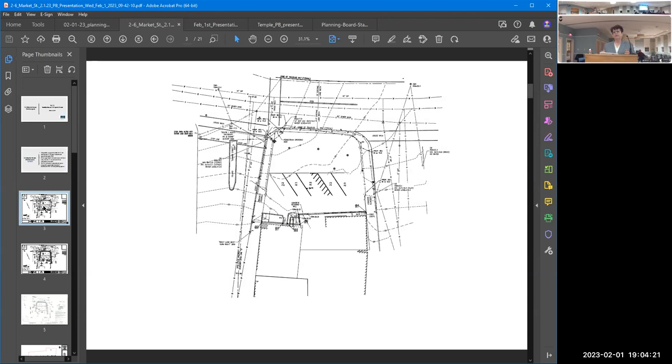And so the applicant can install 5 lifts, which would accommodate 10 spaces, and then there's an at-grade space on site, which was what the original plans were. It does not change the topography of the site. There will be modifications to where the lifts actually attach to the site. And again, if you want Matt to talk about that, we have that information here, because I know some people wanted more details, but now that we know that it can happen, that's up to you whether you want that presentation.

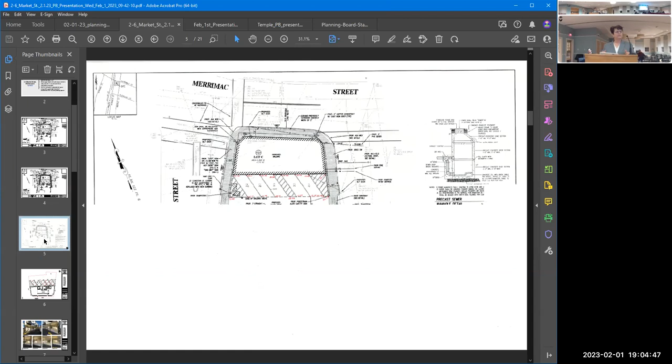So if you go to the next slide, you can see this was the original approved plan. You can see where the original lifts were required, and the at-grade parking spaces up Summer Street on that side. And if you go to the next slide, this is that... the next slide? It's the next one. Oh yeah, so if you go to the next slide, sorry. Okay. Oh, I forgot Matt put all the other slides in. All right, so in any event, there we go.

Thank you, Andy. It's the same thing, it's just a schematic of the various grade differences, but now those will all be filled with lifts. And so we don't need relief for the residential units, which was part of the original permit. However, we are requesting 1 additional ITF space for the commercial space, because the additional 400 square feet goes over the amount that we had.

And so we would request that that modification occur and that you issue an ITI special permit for that additional space. And with that, I can turn it over to Matt if the board has any questions about the details of how that is happening. So before you go there, just to clarify, that space with the handicap space, that's not going... No, that's not going to be there. It's going to be a lift. But the dimensions of the space are as shown there. Those are the dimensions. Okay, if you go to the last slide, Andy. Thank you. So there they are.

I think this is pretty simple. Do any members of the board have any specific questions about the proposed change plan? Richard, Alden, Heather, any questions around this? Sorry, this is Richard. Only to add that this is great. We're so happy that the manufacturer was able to accommodate.

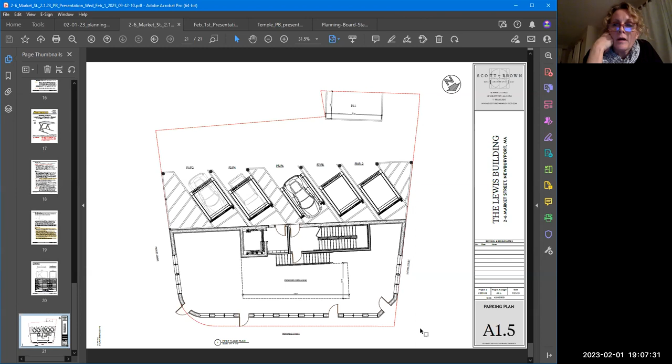So if board members don't have any other specific questions, I think we just move on to the public hearing. I'll just open it for public comment. Are there any members of the public who wish to be heard on this application? I don't have any questions, but I think this is fantastic, and I commend them for going through so many channels to get this right. Seeing nobody from the public, I'll close the public comment and ask the board for your preference on this.

I guess the question would be, do we have a motion to amend the prior special permit for ITI to change it from 6 spaces to 7 spaces? Correct. And we could basically use the prior findings with just the modification of the numbers. And that's it. It's just a couple of modifications to the prior findings. Do board members want me to recite those, or is it simple

enough? Okay. So could I have a motion then to amend the prior special permit to change the number of spaces for the ITIF from 6 to 7? I'll make the motion. Second. Okay. Then I will go through the roll call. Alden. Yes. Yes. Jamie. Yes. Heather. Yes. Yes.

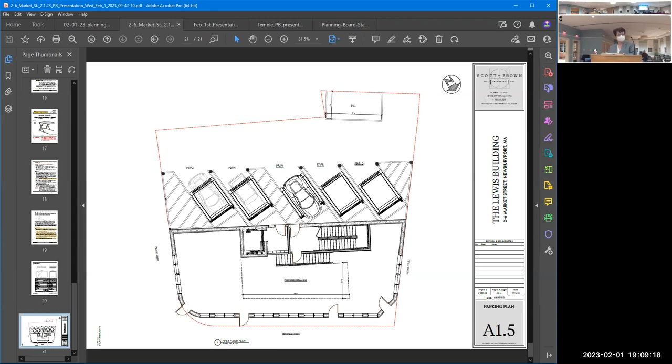We need this vote. There he is. Richard, are you with us? I said yes. We lost the connection with you. Thank you. Okay, yes. And the chair votes yes. There you go. Thank you very much.

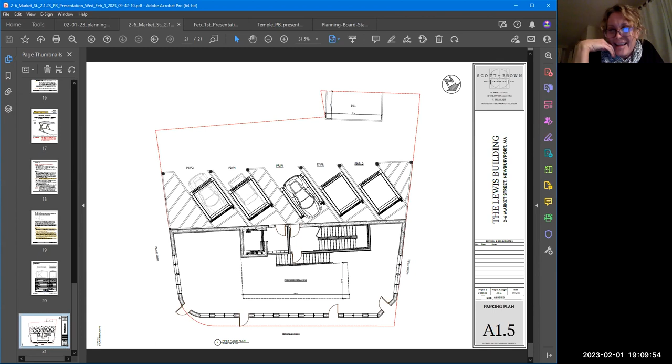Rick, yes. I feel like I'm either losing the connection or I'm having just a hard time hearing when it's not someone speaking at the podium. It's going in and out, I feel. Difficulty hearing my microphone? I don't hear complete sentences from you. And I know that you're probably speaking in complete sentences. They're not coming through that way. Just wave your hand if you have a problem.

Okay, the next item on the agenda is the request for Kenneth Woods at 20 Temple Street for a special permit for non-conformities. Yeah, I am Ken Woods from 20 Temple Street. Can you speak a little bit louder, please? I'm Ken Woods from 20 Temple Street. What do you want to make? We have a couple of slides up from your materials. Did you want to speak to those for the board? So they have a summary of what you're looking for. Okay, sure.

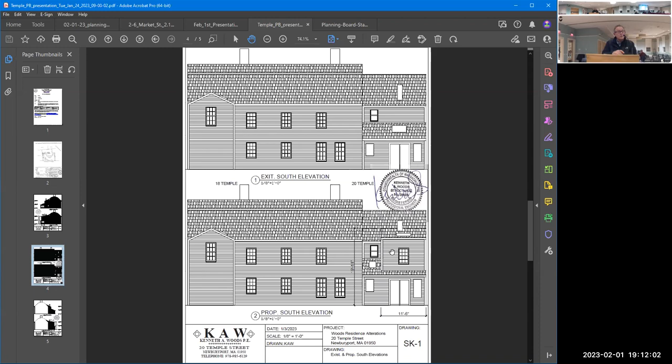That's the rear view. On top is existing. Yeah, the new stuff, he's mousing around the new proposed. It's about 11 foot wide and 7 foot off the existing rear wall of the second story. That's the view from the west. Same idea. 7 foot off the existing rear wall.

Do you have anything else you want to present to us, or is that it? No, that's it. Is there anything more you need? We'll find out. Okay. So again, so the board understands this, this is not the type of special permit that typically comes to us as a special permit for non-conformities. It's the type of thing that the zoning board would typically see, but because it's in the downtown overlay district, it comes to the planning board rather than the zoning board. And so, are there any questions about the application from the board members?

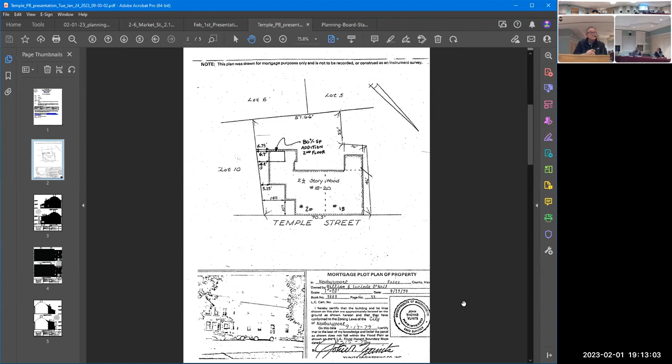Yeah. Just a couple of questions. I noticed that, at least from what I can see, there are no materials identified on the building elevations. So could you talk a little bit about the existing clapboards, and with the addition, are you intending to match the existing? What are the basic materials that you propose?

Yeah, well, the building is originally 18th century. It was a salt box to start. It turned into a gambrel form in 1767. In 1832, the 2-story shed was added on the east side. All of it's in wood clapboard. All the windows are wood, true divided light. Put true cedar shake on the roof. I intend to match every aspect of what is there now. Thank you.

Any other questions from members of the board? See anybody? Okay. In that case, I'll open it up for the public hearing. Is anybody from the public who wishes to be heard on this application? I don't see anybody, and we have one person remotely watching. Okay. So in that case, I'll close the public hearing and suggest that we have a motion to approve the special permit for non-conformities as submitted, or any other modification. And we include the comment about material.

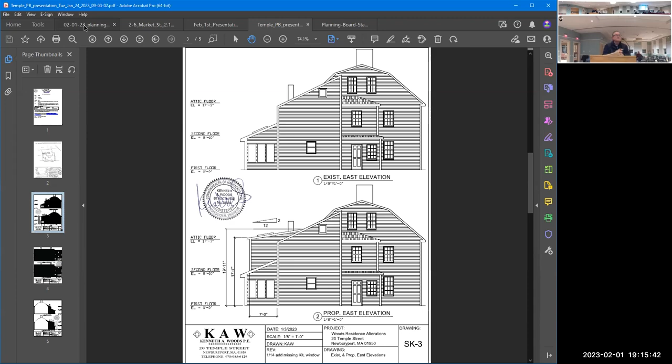The next item on the agenda is the request for a minor modification at 3 Doyle Drive. So I'm Noel Teresi. I'm speaking for Judy Burke. Could you speak up? I'm sorry. I'm Noel Teresi. I'm speaking for Judy Burke, the homeowner. The closer you speak to the mics, the easier it is for folks remotely. Oh, so is that better? It's better just because it amplifies voices.

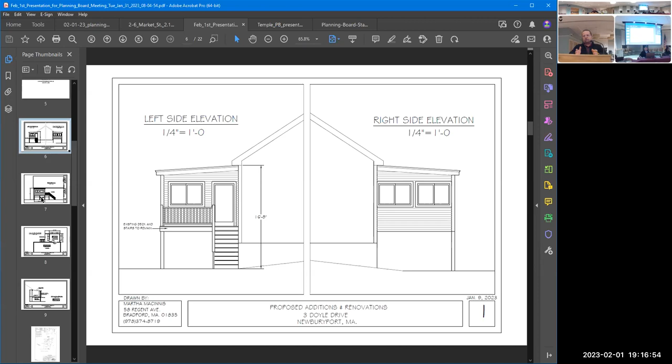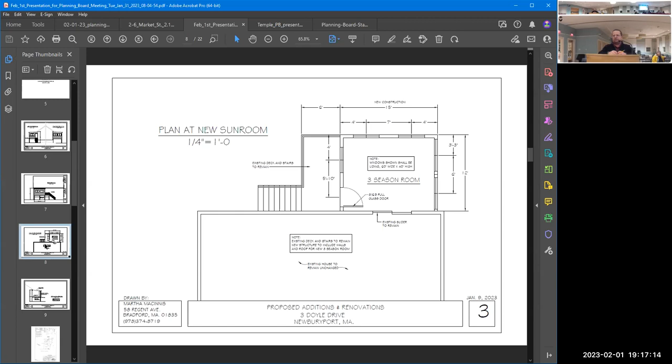Thank you. So we were here last month and we were asked for a better set of plans, which I believe we provided. We also provided letters from all the abutters that they saw the plans and that they approved. I'm not sure if you have the copies of that, but I do have a set of copies. You all set? Yeah. So it's basically what we had spoken about last time. It's an existing deck. She would like to close in part of it to turn it into a 3-season room. All the siding and roofing will all match the existing home. And the elevations show pretty much everything that we're doing. I don't know if there are any other questions or anything that I can help with. Do the board members have any questions about this application with new plans?

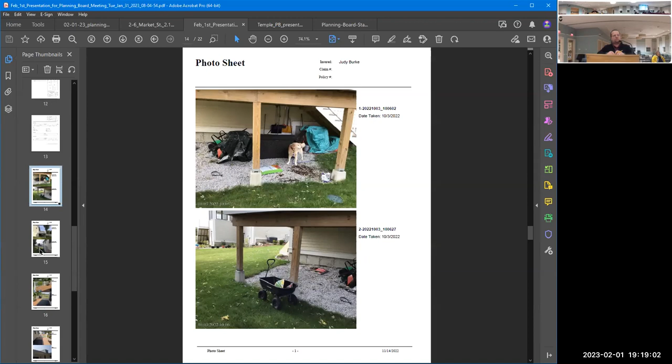There are no further questions or comments from the board. I would like to have a motion to deem this request minor and approve the minor modification request for 3 Doyle Drive with the definitive plan and special permit as requested. So Bob makes a motion. Is there a second? I can second. Richard? Thank you. Okay, we'll go through the roll call again. Alden. Yes. Yes. Jamie. Yes. Heather. Yes. Richard. Yes. And I vote yes also. So thank you. Thank you very much.

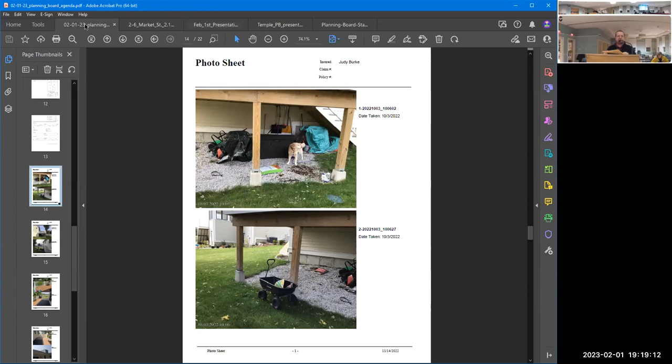So now we move into other business, talking about the zoning discussion that Andy would like us to consider. So you want to do an introduction? Sure, thank you. Members, this is per our mention in the last meeting. I just wanted to get your thoughts, if you have any in particular, and if not, that's fine too. But I just wanted to get any thoughts you might have on two specific areas.

The business park: we're looking at trying to make some zoning adjustments there that may help to spur economic development there, a little bit more potential. And so I wanted to, without throwing anything out there, just get your thoughts based on what you've seen out there, what you'd like to see out there. If there's anything in particular that you'd like to see change, just so I can keep that in mind as we're thinking about making those adjustments. And I'll defer to the chair on any discussion we have here.

But the other area was just outdoor seating, and the general context behind that one is that since the pandemic, there's been a little bit more expansion of outdoor seating. I think generally speaking, that's a good thing. It adds to the vibrancy, downtown for instance. We have seen that both in some of the parklets that the city council oversees, as well as some of the public spaces in the street, along the right of way there.

And we've also had a few private lots where this has been done, essentially swapping a few spaces for the outdoor seating. So the question here, generally, you don't have to get into the weeds necessarily, is do you have any thoughts or preferences as to how we handle that going forward? We'll do some sort of zoning adjustment in the coming months, and we've been talking with a few councilors to try to work out the kinks, to have something that adequately covers in zoning the allowance for that and how it is allowed. In the public right of way, the city council has jurisdiction and can decide where to allow it and how many seats.

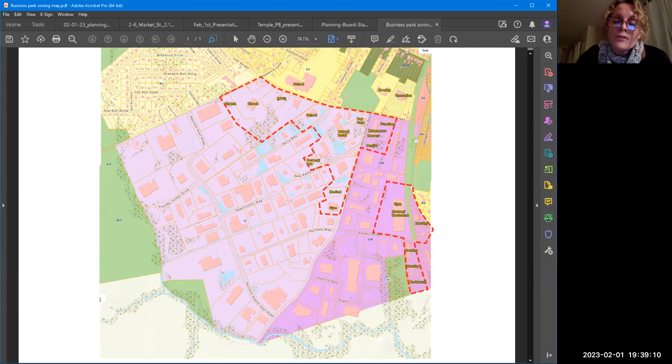When you're talking about creating this transitional district, are you talking about only within this red dotted line, or are you just highlighting these as examples of the industries that are already transitioned? Like, are you saying that we would expand it, or are you saying that we would limit it to sort of this footprint already?

I don't want to speak for Rick. I think Rick was highlighting what's there already, but my sense, and it sounds like Rick maybe is on the same wavelength, is that we're really thinking about it as a corridor or a section as opposed to just restricted to dotted areas. Maybe that piece would extend down Graf Road, maybe extensions of the district, as opposed to being exclusively within the red dotted areas.

I think what perhaps he was showing is the fact that there's already complements of some of these uses there, but one could argue that it should be a continuous district or section, not just these blocks that are blocked on here. Right.

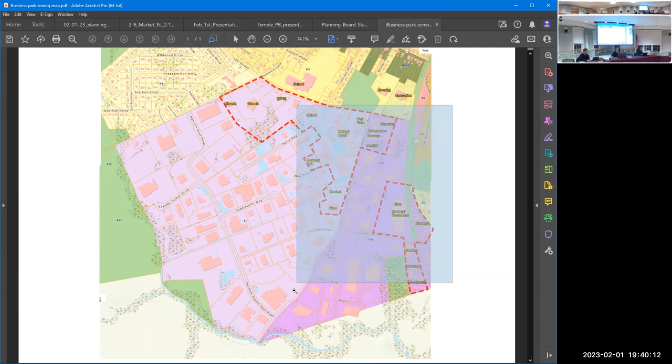Without looking very carefully at what the uses are there, and perhaps even talking to some of the property owners, I'd be hesitant to expand the district to include, for example, the lumberyard, which is really oriented toward retail customers. There are uses in here that are on the margins between public oriented and just wholesale business oriented uses.

The lumberyard is one. There's a plumbing supply place down on Parker Street. There's Plant Works, which is kind of an office use, but it's also kind of a commercial greenery landscaping place. So these are areas that merge. So I think we need to look at it.

I guess that's all I'm trying to say: there are areas that have already changed, where in some ways it's pretty easy to say, let's zone it for what's there. And then there are areas in the middle, between the two red outlines, where I don't know what the answer is. I think we need some study. Does that make sense to you, Heather?

It does. My thought is this has established itself somewhat organically. These businesses have come to these locations because they needed more space, more parking, or the price was right, and they've chosen to be in this area as opposed to downtown. So if we create this district, I'm pointing down towards Opportunity Way, organically some other businesses might cluster in another area of the park.

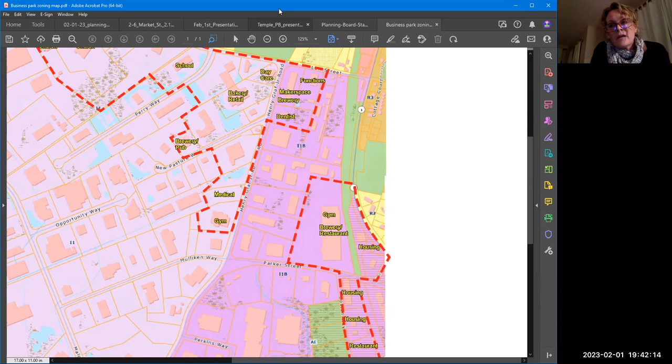So would we be seeing in the future that we would be expanding this transitional area or having pockets in other areas over time, because it may not just grow out of this one section? The park may change as needs change.

Right. I saw it as the near term, maybe the next decade, that the city would benefit from this transitional district. To your point, it's very possible long term because we don't know what's going to be out there decades ahead. There could be more pressure to consider things further in the park. But in the near term it may not be that likely that it expands there, or that we'd want it to expand that far in.

So I definitely think you're right that we may eventually want to look at something like that, but I don't think we're close to that right now. I tend to think it's more towards the northern part or the eastern part of the park generally.

When you say transition, are you talking about use? Like, is it more of a customer focused use? It's something that addresses the street, that talks about setbacks.

Are you all still talking about adding different uses to that thing? Well, I guess I would be thinking about making sure that the uses that have been established over time, however they were established, the schools come in some way, the medical facilities that come in by special permits, the gym probably. I'm not sure how these have come in over time. But I'm thinking that we would want to be thinking about this area as, okay, these are uses that have been let in somehow, whether it's by variance or special permit or something else, and they're working. So let's recognize them in the table of uses.

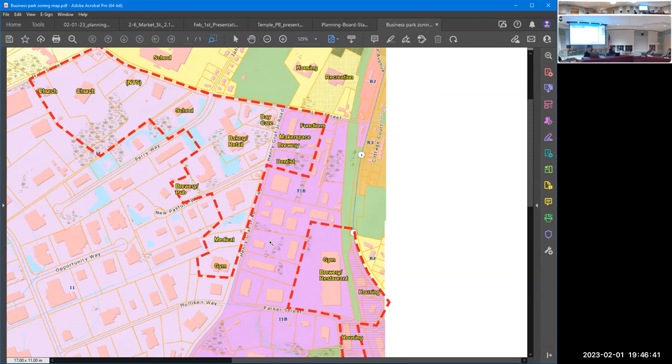I think it partly depends on us to generate the demand, and in turn, look for that to try to adjust the routes. But it makes sense if they're serving the train station and if they're serving the hospital, somehow there could be some kind of link between those areas. Right, and I think in some ways we're trying to establish maybe a better linkage between a residential, mixed-use, transit-oriented district created around the train station, and the employment center and the business park, and not having it be just completely isolated, exclusive uses as we have in the zoning.

So, would you allow multifamily residential in this use? That is not on my radar right now. It may be, like Heather said, something long term the city goes to, but I don't necessarily see it on my radar or something that, in terms of the adoption process, would be palatable right now, or... 24/7 environment, sidewalks, and pedestrians. All of that gets reinforced. So it does have proximity to the train station, it's right next to it. It was pretty close. For multi-family housing, it's areas like this that make a lot of sense.

Yeah, and I can see that as perhaps a longer term or a secondary consideration, but it maybe goes to a little bit of the MBTA, DHCD guidelines we're going to have to be looking at this year and next year, because we will have to look at our 40R district according to the state and look at either modifying that or building off of that to have more residential that's allowed, quote unquote, as of right in proximity, and maybe this area is one of those important

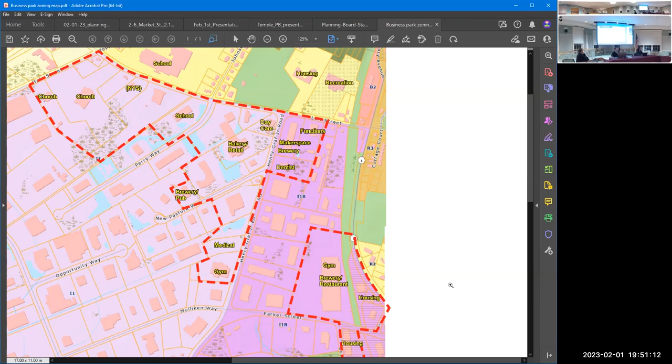I think another point, based on just what you said, is that there's been a significant amount of recent reinvestment or new investment in the rear part of the industrial park, going along Newburyport and Opportunity Way and so forth. And there hasn't been that much in that northern area. It's partially lot configurations, partially wetlands and so forth. But I think this is less likely because of the amount of investment in some of the real manufacturing facilities in the more western part of the industrial park and business park. They're probably less likely to be looking for different types of uses if they've been doing a lot of investment.

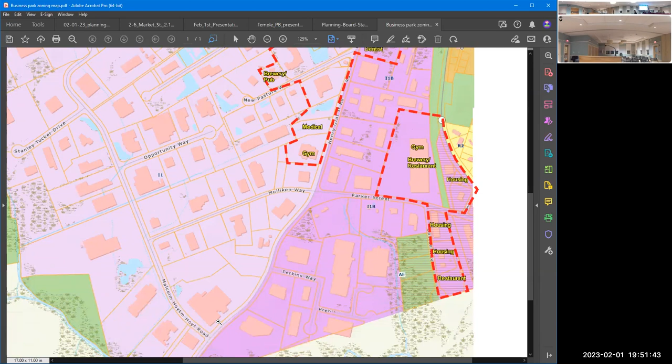I have noticed, I'm not sure if the map goes down that far, but actually that last building opposite the end of Newburyport Road, that building right there, there's some non-business type uses in there right now. There's maybe a health facility or something, so that's the kind of transitional, right? Sure. That one I don't know the origins of off the top of my head. There are a few others that we've had there, like you said, fish management style things and so forth. But there has been an evolution over time. And we haven't necessarily seen business park property owners coming out and opposing everything, but we have seen them come out and oppose some of these things.

I think it'd be really important to come up with a first conceptual draft and then have a meeting of those industrial property owners and businesses to get their feedback on it, because we certainly don't want to be seen as imposing something on them they don't like. Agreed. And actually, one of the things that I'm trying to work with the chamber on is trying to reestablish the business park association that has kind of lapsed over the last couple of years, to see if we can bring that group together so we do actually have more or less a unified voice in the business park on what's acceptable, as opposed to having 100 different opinions or it being hard to get their attention and opinions.

We used to be able to have sort of a meeting where we were all together, and there was a good chunk of the representatives. Here we have to try to reestablish that a little bit, because that's kind of missed a lot out there, and sort of get a voice or a meeting together again. It's easier if you have an association. Any other thoughts on this?

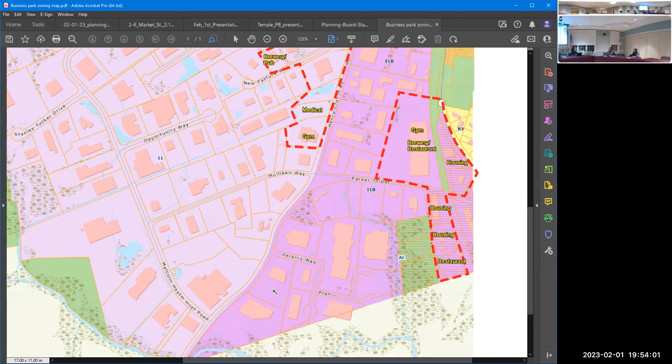Thanks, everybody. So then the last formal item on our agenda is approval of minutes. We have the minutes of the very brief meeting on January 18th. Does anybody have any comments or questions or edits for them? I have none. If not, can I have a motion to approve the minutes of January 18th? Thank you. I'll second it. Thanks. So I'll do a roll call.

Alden. Yes. Bob. Yes. Jamie. Yes. Heather. Yes. Richard. Yes. And I vote yes also, so the minutes are approved.

Okay, updates. Andy. Just two things. Like I said earlier, the DHCD guidelines for MBTA communities are requiring us in essence to allow 1,292 units in close proximity to the train station. There's a little more flexibility in there than the guidelines DHCD had originally issued. So we have a little more control, but we'll have to work closely with planning board members. I know Rick and Alden had agreed to be part of that working group to put together some options.

We'll have to work closely with the council as well over the next 2 years to adopt zoning pursuant to this housing choice statute and DHCD guidelines to encourage more residential in close proximity to the train station. And we have some flexibility. We're looking, say, further up Route 1 or even in the Story Avenue area. We have to talk about where we want that to happen and meet the state's requirement, but do so in a way that's sensitive and appropriate. So we're working on that.